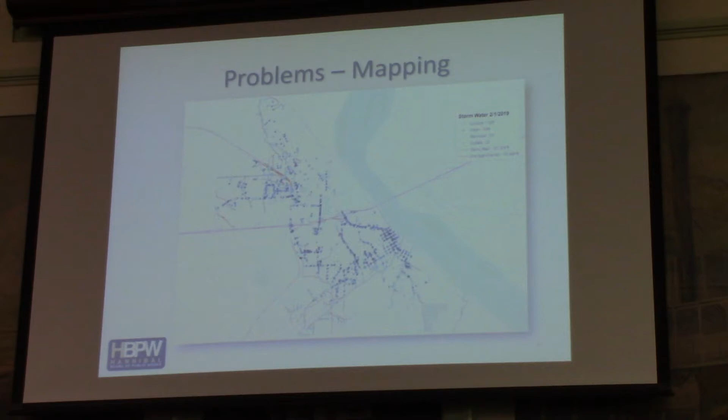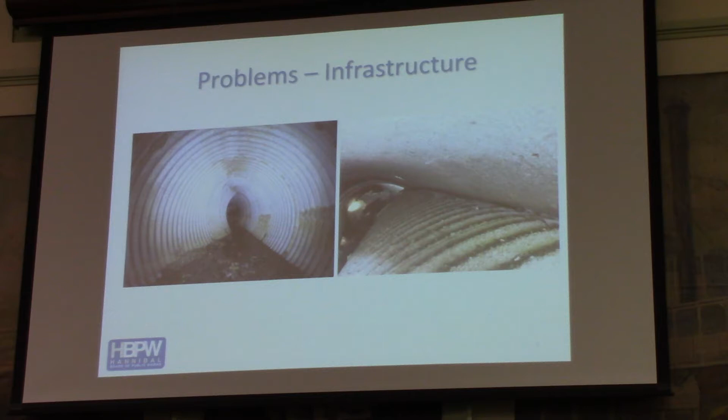So that's going to be another challenge we face moving forward. Again, the only reason we were aware of this is because a sinkhole developed in the alley, and it started falling in. Without that, we wouldn't even have known this problem existed.

We started out with one hole, and now we've got 3 or 4 holes that have developed. This box culvert is only a couple inches below, right underneath the asphalt, and for the length of Martin Street, it's in bad shape. This has required that we close one lane of traffic, so it's only allowing traffic on the far right side.

Sorry, how long has that been like that, approximately? Two years? It's probably been since 2016.

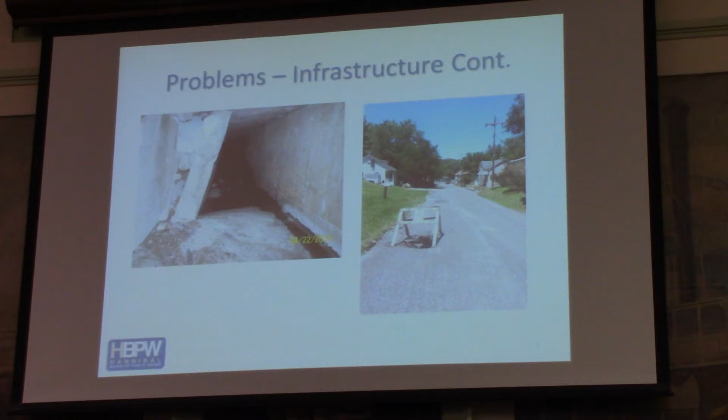And then to come into regulatory compliance—the MS4 permit has 6 minimum control measures that your program has to contain. Back when the Board of Public Works was given control of this permit in 2017, it required us to update our stormwater management plan, which we did and submitted to the Missouri Department of Natural Resources in May of 2018. And then it required certain goals that were set for each one of these 6 control measures.

An example is public education and outreach—do we go out and talk about pollutants to school-age kids, or do we talk at public meetings? These are things we're required to track and report to DNR every 2 years when our report is due. These requirements are not going away; they're only going to become more strict as we move forward.

And they're not concerned about the stormwater infrastructure per se. They're more worried about the quality of water at the end of the pipe when we're discharging to Bear Creek or the Mississippi River.

So, Matt, can I ask a question? Yes.

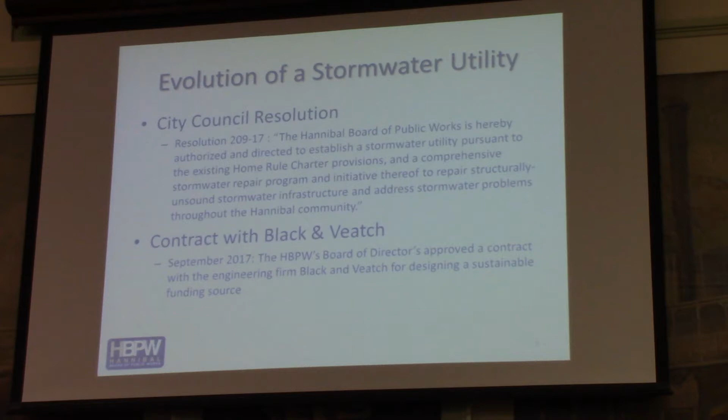And the example Matt gave as far as a social media post, that is relatively insignificant when it comes to cost. It's usually just someone like me trying to find material to post.

But another example is we have to do illicit discharge detection and elimination. So basically part of that is all of the outfalls that are in town, we have to develop a plan that we can actually test during dry weather. And if we find a pollutant, like a sewer maybe attached somewhere in that storm drain and being emitted into the creek, we have to spend time to try to find where that is and eliminate it.

And so that would cost a lot of money just to get them off of the system. So when he gives an example, some of them are relatively insignificant when it comes to cost, but then others of it are going to be very costly.

And that's where the development of the map comes into play. If we have an outfall here that we're testing, we've got to know where it goes upstream so that we know even where to look for a problem should we find something like that.

How many outfalls? We're up to 35 right now, but we're getting more of them. It's something he hadn't changed in the map. I talked a bit with you about it the other day. We're finding a lot more than that. And when we got the program, there was 22. So that was what the city thought they had back when they were in charge of the program.

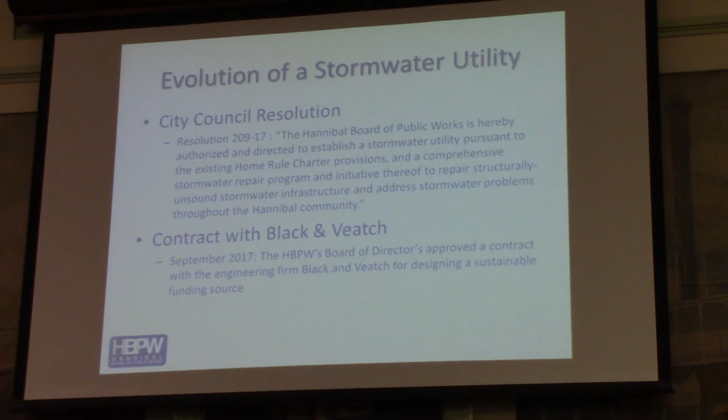How the board took that was they contracted with Black and Veatch Engineers in September of 2017 to help us set up that utility. None of us at the utility had ever been on the front end of setting up a utility - what type of services, what type of funding do we need, and how do we develop a fee structure to get that?

So when we started looking at it, what things did we need to have, in our opinion, to set up a new stormwater utility? First is, again, a dedicated funding source. We needed something that we could plan on having year after year so that we can do the necessary maintenance and O&M that is required of the storm sewer system.

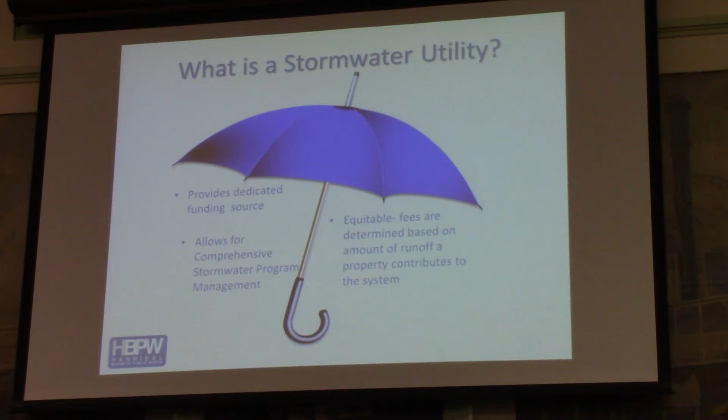It allows for a comprehensive management plan, not only the infrastructure, but also to meet the requirements of the MS4 permit. And then also how to make it equitable to all the customers within the city - we don't want one group or another paying more than their fair share.

Other communities are facing similar problems that we are. I know locally, Moberly, Missouri is going through the same thing.

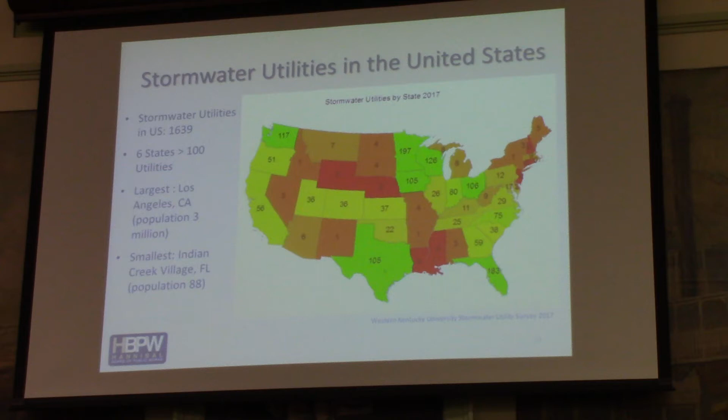I have another question. This map doesn't look to be based on the politics of a region. It's kind of bizarre almost. Can you lend any insight into why?

It would probably go back to state legislators—some states do not allow the development of a stormwater utility. Some of it is just political preference. For example, I attended a conference in Colorado where water can become a scarce resource during certain times of year, so they want to protect it as much as they can. If a contractor was excavating for a foundation and groundwater came into that excavation, in order for that contractor to pump the water out and have it leave the property, they'd have to have a permit. So political preference is a lot of it, and some is driven by how they view that resource.

Some of it is also industry. For example, Texas and Florida have the petroleum industry, and they're particular about their runoff in Texas, so there's nowhere for the water to go basically—it runs out to the Gulf.

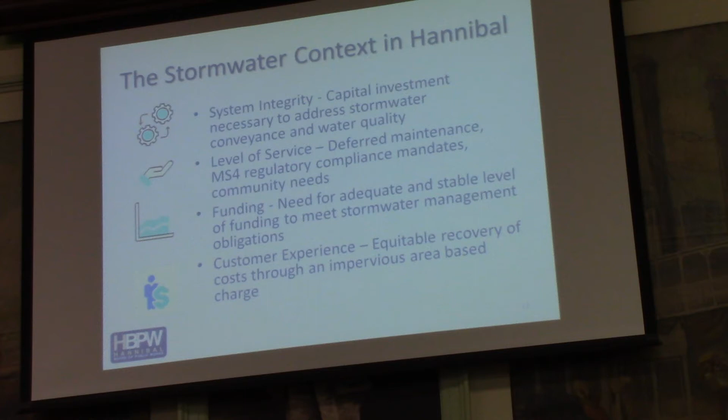So your funding estimate—is that going to cover curbs and that stuff, or are we not focusing on that right now, mostly underground and on permit?

We're focusing on the permit. We're focusing on some type of condition assessment. We do know some items that need repair because they've come to the surface, but the bigger question is what is still lurking below ground that we don't know about. We want to make sure we're spending the money we have, should we have money coming in, as wisely as we can.

Over here on this third storyboard, there's a 5-year plan laid out after the implementation of the utility, projected to be July of 2020, and that's what this funding is based upon.

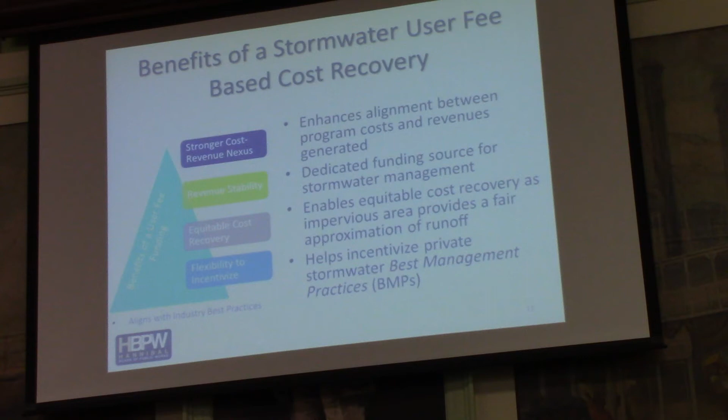It provides an equitable cost share between the different customers that we have. Somebody that doesn't have a bunch of property is going to be paying on a percentage the same share as somebody that has, say, 10 or 20 acres here in town. It also allows us the ability to incentivize best management practices, rain gardens, things of that nature that allow the water to be absorbed in the ground rather than run off. By having a fee, you can schedule that fee to help drive the implementation of those BMPs.

So how do we do the multi-year financial plan? Again, we looked at the O&M requirements, what capital investments we had outlined, and then also any reserve requirements that we have with the utility. We come up with a multi-year financial plan, again over here on this third storyboard. Then moving forward into fiscal year 2021, how those revenues stack up against the services and the costs we would have providing those services.

Again, this is just a duplicate of what is over on that board there.

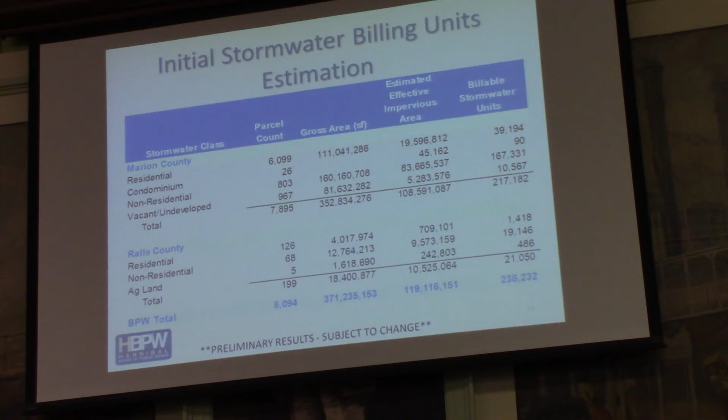So how we came upon the billable units: we took information available from both the county assessor's office with their aerials. They know building footprints, size of driveways, and stuff like that, and we pulled from that information. What we came up with was there would be roughly 119 million square feet of impervious area within the city limits. Going through a vetting process, total billable units we'd end up with would be roughly 238,000 units. That's because maybe somebody tore a house down, or what was available through the county assessor's office isn't what actually is installed any longer.

So we built in a little bit of a factor for appeals, so that we can make sure we're charging based upon what is actually there and not something from a picture a couple years ago. And then, implementation of credits for going above and beyond what is currently in the city code, incentivizing people to do so.

We took those billable units, we knew what our revenue requirements were by laying out what our services were and the costs associated with those services. So you just divide the revenue by the number of billable units, and you end up with our proposed stormwater user fee. That proposed stormwater user fee is $1.39 per 500 square foot.

That's something that Black and Veatch is working on with utilities across the nation, and the normal unit is an equivalent residential unit for stormwater. Again, that's based upon the impervious area for a given parcel. Impervious area being anything not allowing water to penetrate the ground and be absorbed - so roofs, driveways, sidewalks, decks, pools, those type of things. Based upon the information we had, the stormwater rate is $1.39 per 500 square feet.

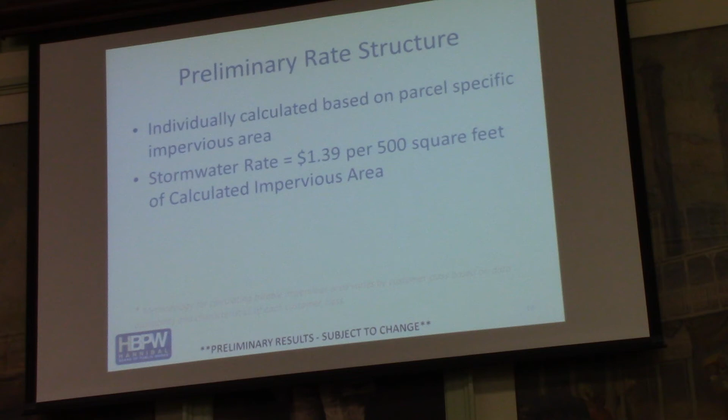So that leads us to what Proposition S is. It is a proposition that the council has placed on the April 2nd ballot, allowing us to collect a fee for the development and continuation of this stormwater utility.

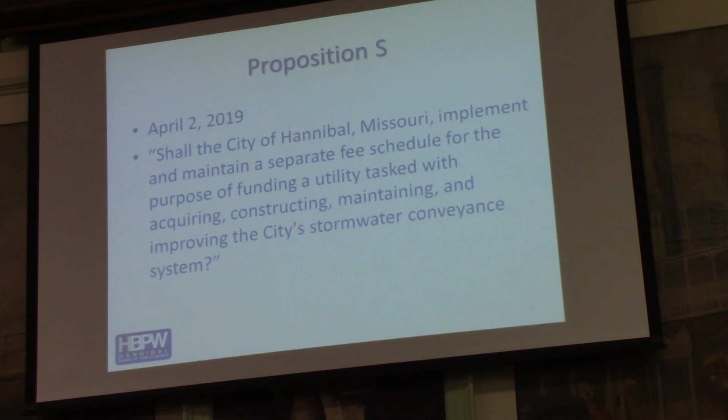Yes, can I ask a question? Yes, sir. How will you calculate my home? None of the water running off from my home runs into a storm drain of any sort, it runs into a creek. So how would you calculate mine?

Again, by impervious area, roof line. It's still part of the conveyance system that we're responsible for maintaining. If none of the water from my home - I own almost 2 acres, and I live at the top of a hill, and it all runs off and down into a creek - so how can you be honest and give me a fair rating? Because none of the water from my runoff runs into a storm sewer, and you're charging people by the usage of a storm sewer. We're charging it by impervious area, by roof line or driveway. We're not charging by use of storm sewer.

Well, I don't quite understand the driveway part of it, what you're saying. The driveway doesn't allow water that falls to enter the ground. It all runs off as runoff. Yeah, but my driveway runs off into a creek.

That creek still needs maintenance. Who does the maintenance on it? Us or the street department? You gotta be kidding me. When does the street department do downstream maintenance? Nobody now, but in the future. Okay, I'll stop.